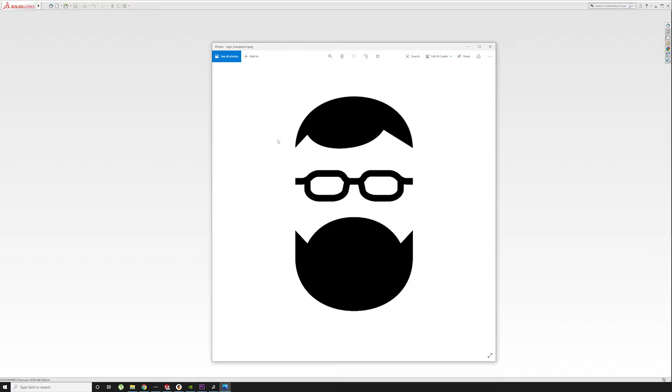So the first thing we need to do is take my logo file here, which is a PNG. We need to convert this into something SolidWorks can deal with a little bit more readily. SolidWorks deals better with dimension files, I guess, if there's a better way to say that. So I'm going to convert this into a DXF.

Now I know you can import this directly into SolidWorks, but I find this process a little bit easier. So I like using Convertio.com. You can pretty much convert just about anything into anything. If you've ever Googled convert PNG to DXF, it's usually one of the top listings. It's free, it's quick, I like it. I'm not sponsored or anything.

So we're going to find the PNG, logo.png, and then we're just going to go ahead and hit convert. It's going to take a couple seconds, and then we can download our DXF. As you can see, I've already kind of done this step down here. So we're going to go ahead and hit download, and that gives us our DXF file.

So now from inside SolidWorks, we're just going to start a new part. Nothing special here. I want to deal in inches because I'm from America. And then we're going to go ahead and hit File, Open, and open that DXF we just created. You're going to get this dialog pop up.

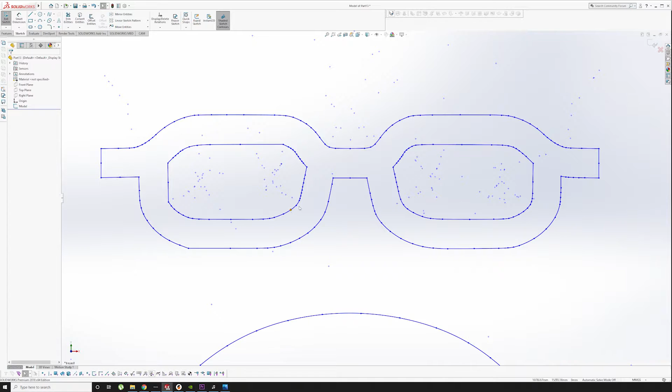We can do a bunch of different things. We're going to import this as a 2D sketch. There are some options you can go through here, but we're not going to mess with any of that, and we're just going to hit finish. So this is what the sketch looks like when it gets imported, and it did a really good job of getting all the lines. Of course, this is a relatively simple part.

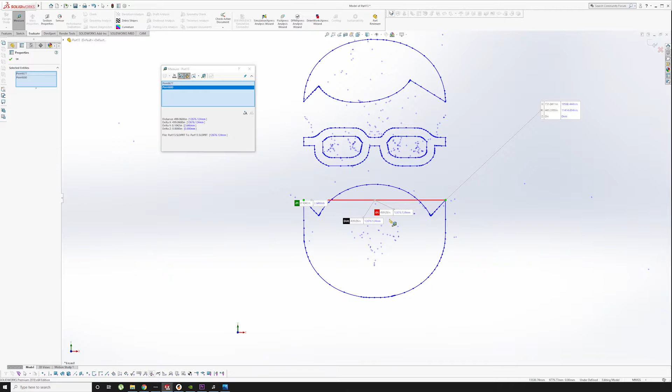So the next thing we need to do is make sure this is the appropriate size. If we go over here to Evaluate, Measure, and I'll just do the width here, it is 499 inches wide. That is a little bit larger than the scale of my CNC router.

So there's a couple different ways you could do this. You could just select this whole thing, go to Tools, Sketch Tools, and do a scale. Or the easier way is I just want to go over to Sketch, Smart Dimension, and set this to the dimension that I want.

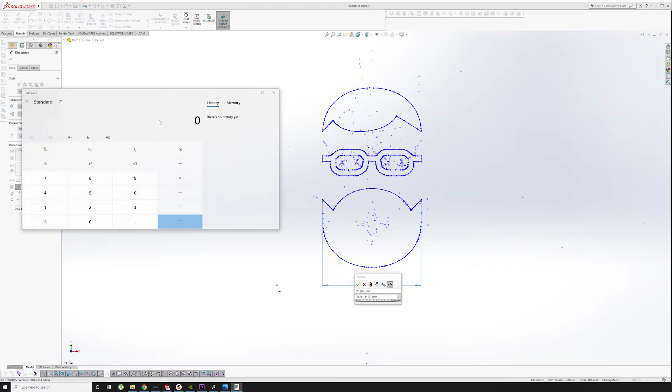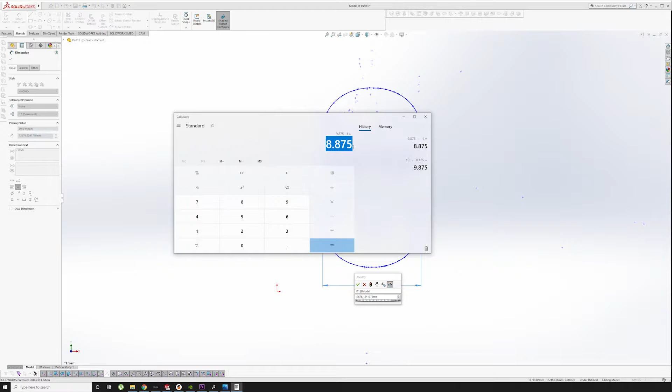Which is going to be... actually that's a good question, so let's open up our calculator. This part is going to be made out of a 10-inch piece of aluminum. So 10 inch, I want a buffer of about 1/8 of an inch for contouring and cutting the edges down, which leaves me with 9.875. Then I'm going to have a 1/2 inch lip on either side, so minus 1. So I want this piece to be 8.875.

This will make more sense later, but 8.875 is what I want this to be. So, 8.875 inches, and there we go, it just kind of scales it. If you do anything else before this, you're going to ruin the drawing and it's going to go all weird. All of this is blue, so nothing is defined. You can see you can drag and screw this up a lot right now.

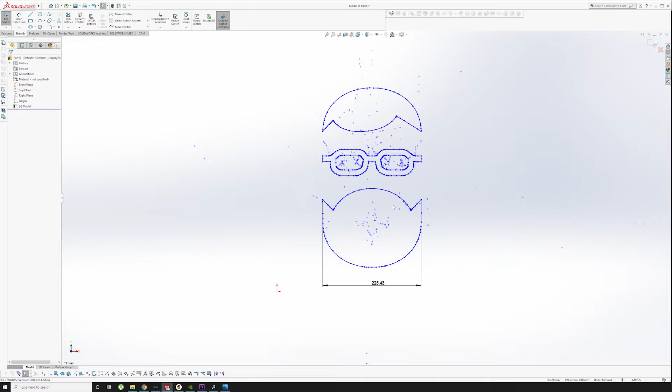So now that this is kind of the appropriate scale, the next thing we need to do is move this down to the origin because it's just in this strange spot. So what we're going to do is create a center line, and I'm just going to do it right here on my glasses.

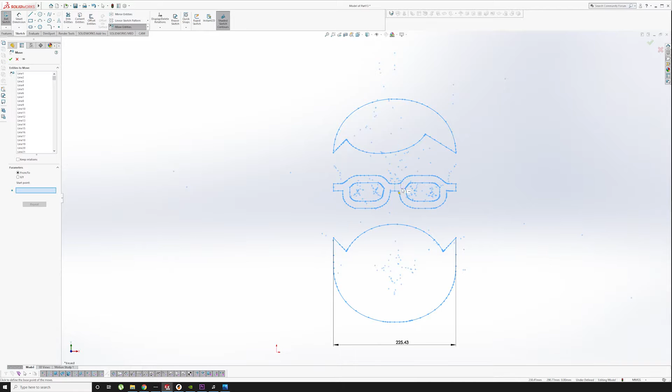This is basically going to give us an anchor point that we can use. So the next thing we do is select everything, then go into Tools, Sketch Tools, Move, and select a reference on where to move it. We're going to select that point, and you can see it's now moving, and then snap that into the origin.

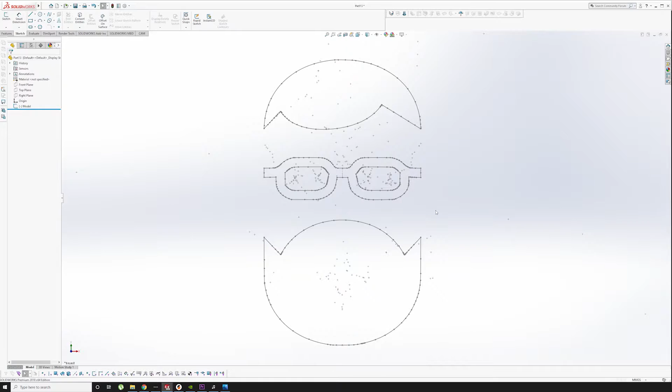So now we have a sketch that looks a little bit ugly, but whatever, and it's snapped directly to the origin. So now the sketch is here, it's in a reasonable spot, it's scaled, all that good stuff.

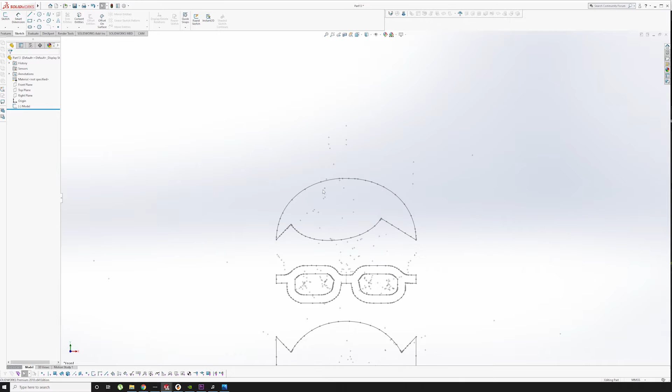Let's clean it up a bit. You see all these little things - basically each one of these is the center of each one of these radiuses, and there's a lot of little lines all along here. If we go up to the hairline and down here in the beard, you can see there's just a lot, and you can kind of see that this bumps up a little bit. We don't really want that, because when I machine this and do the contour on the machine, it's going to try and follow this path, and it's not going to give us the best edge.

So what we're going to do is convert these into splines. Splines are basically these little things - they're just lines that are defined in SolidWorks that really don't have a defined radius per se. They're just nice, smooth, curved lines. So let me show you what I mean here.

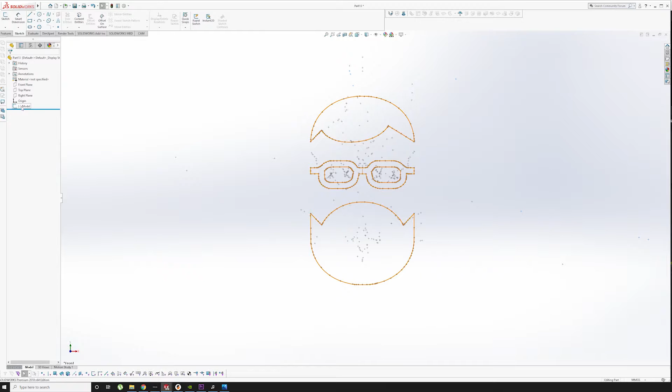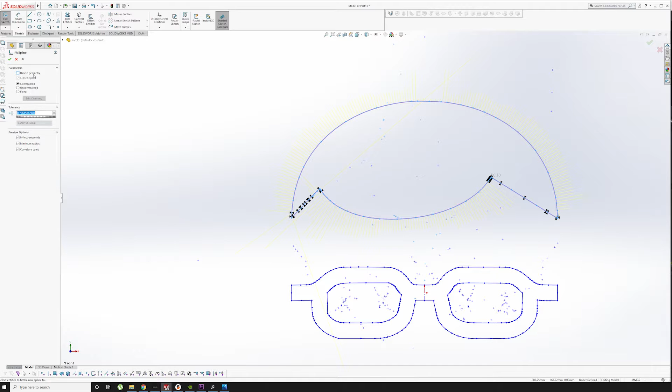So we're going to go into this sketch, edit it, and let's start with the hairline. I'm simply going to select all of this, then go into Tools, Spline Tools, Fit Spline. If I click on this, you can see it makes this new spline all the way around it. Then if I click Delete Geometry, it will actually delete the existing line that's there. So I'm just going to hit OK, and now you see we have this nice, perfectly smooth line.

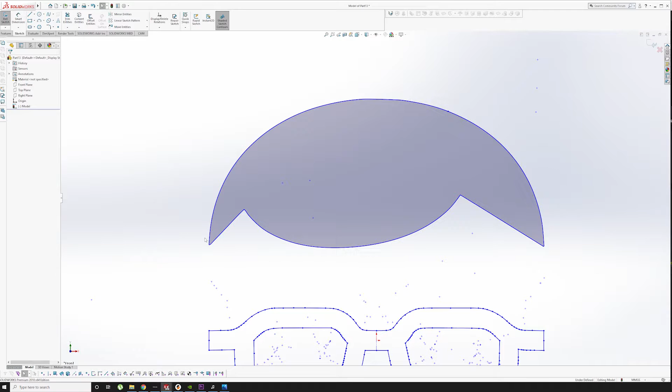Now you can see it's not 100% perfect, but it's totally fine for this. You could go in there and change the deviation if you wanted to get this to fit a little bit better. Or what I'm going to show you here is sometimes we'll have to do this in segments.

So let's go ahead and do the beard next. I've done this previously, and what I found is when you do the beard, it doesn't like to keep these nice sharp angles over here. So I'm going to do this in a couple different pieces. I don't know, for whatever reason, I'm going to exit out and come back in.

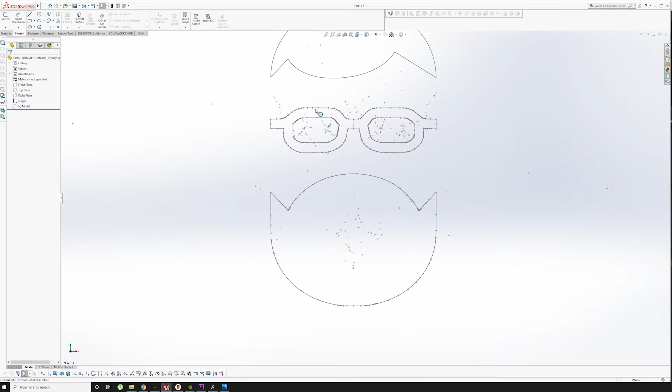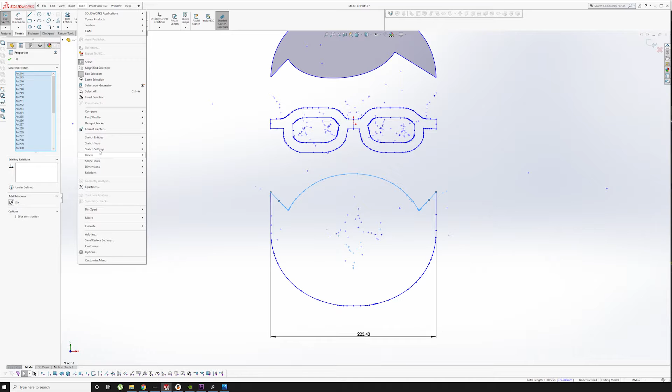That was dumb, but I'm going to select just this section right here. You can see these endpoints didn't get selected, so hold down Control, click that, hold down Control, click that. So now we're just dealing with this section - Tools, Spline Tools, Fit Spline.

We can zoom in and see that everything looks pretty good. Now, one thing is if you click Closed, it will try and close it - that is not what we want. So we're going to click away, and do it in this section. Click OK, and look at that nice, beautiful little spline.

And then we're going to do the exact same thing down below. So we can just select everything here, deselect the spline, Tools, Spline Tools, Fit Spline, and then this looks pretty good. Let's go ahead and just try OK. There we go.

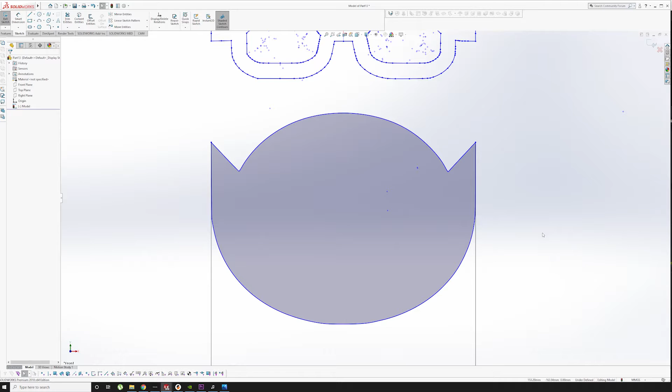So now we have one spline up top and one spline in the bottom, and it's pretty smooth. So now we're going to do the same thing on the glasses.

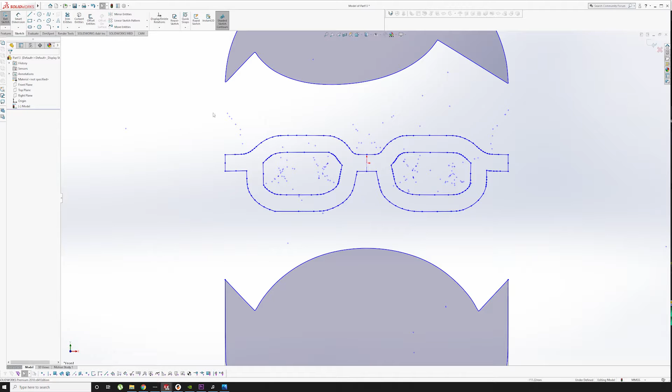We can't select the whole glasses piece because it's actually three distinct line segments. You've got the inside glasses and then you have the outside glasses, so we need to split these up into multiple parts.

Thankfully, the inside lenses of the glasses are easily selected as one loop. If you had an issue where you couldn't select it as one loop, you can just hold Control and then select each individual segment.

We're doing the Fit Spline tool again, and as you can see, it works out pretty good. I hit OK, and then I move on to the other side. Nothing too mind-blowing right here.

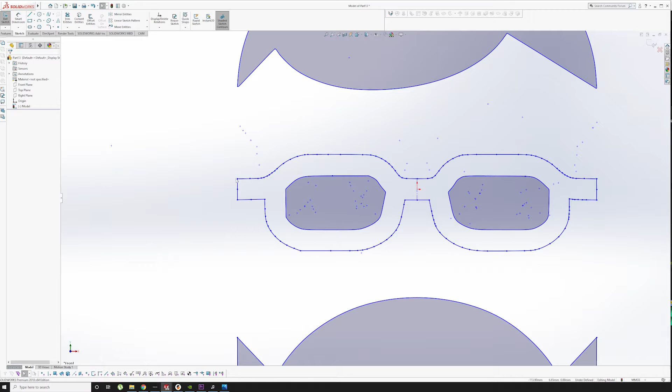If the things didn't work out exactly right, just break it up into individual segments like I did down below for the beard. Now I'm trying to figure out how best to split this up.

If you select everything, which I'm going to do, I think, right here - yeah, oh no, I'm just doing the top. So if you just do the top section, then we can convert that into a single spline, and later I'm going to convert the bottom into a single spline.

So you can see the magic happen right here. Cool, so it makes one nice little smooth curve up top.

Now I tried doing the same thing down below, but watch what happens - it didn't select the two eyeglasses because I didn't select the full entirety of them. So if we go to the fit spline, you can see it looks okay, but it's adding these little radiuses there. It doesn't really like these sharp inside corners.

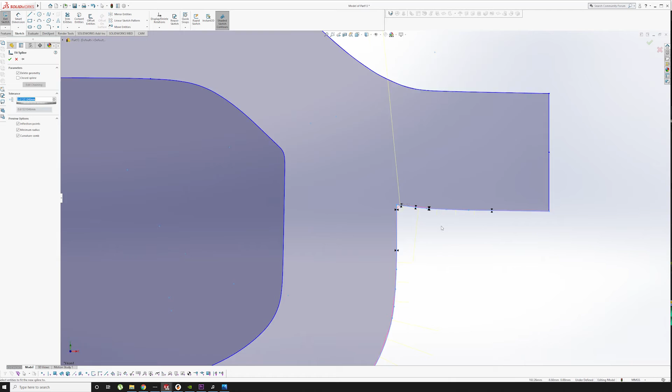This would work for a lot of designs, and I was going to keep it, but what I realize is that when I'm doing the inlay, I want those inside corners to be a defined radius. So I'm going to keep those sharp, and then add a fillet later so that it's basically a defined radius that I can match the inlay with the aluminum.

So what I'm doing here is basically selecting the lower half of the glasses, and I'm creating two separate splines, one on the bottom of each.

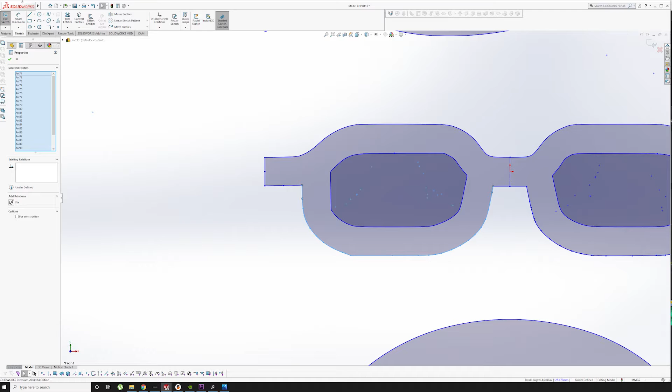Spline tool, fit spline, then we hit OK, and move on to the other side. You can see that creates a much cleaner line, and we still have the sharpness in the bridge of the glasses.

Same thing - hold down Control, select that, back to the spline tool, and then fit spline. I forgot where it was located. There it is, so we're going to go ahead and hit OK.

And then the rest of this is I am just going to clean up the rest of these, because we might as well have as few segments as possible. We want to simplify this sketch down into the most basic components.

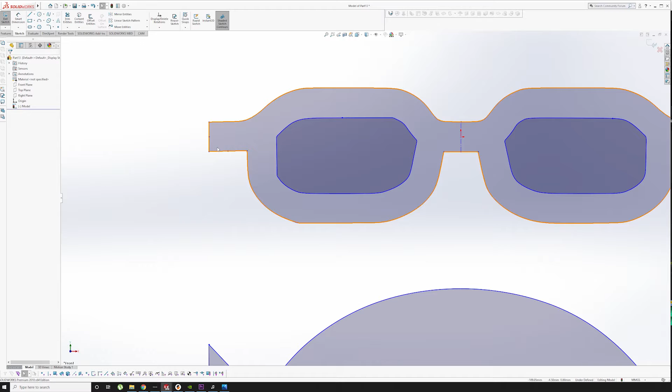We want to have as few line segments as we possibly can. And here you can see I shifted it - don't do that. Go ahead and look at it, marvel in your work, and then fix the rest of these using, once again, the Fit Spline tool.

So yeah, that's really all there is to it.

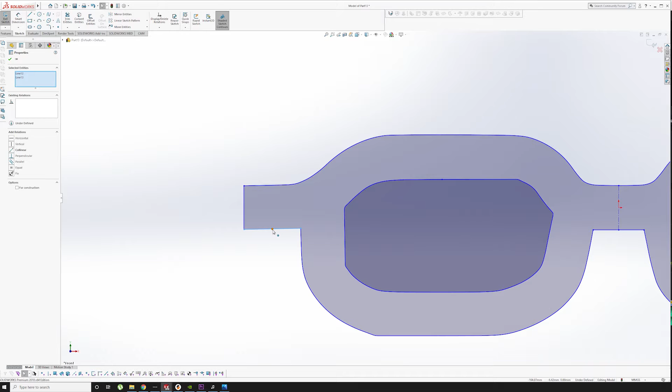This is a new tool that I am just becoming familiar with. This is one of the first times I've ever imported things in and manipulated them, so this was kind of fun to figure out. So yeah, we're just getting rid of these additional line segments.

Okay, so here is the point in the video where I realize I made a very fatal mistake. The top of the hair needs to be a separate spline from the bottom section of the hair so that we can do the offsets properly.

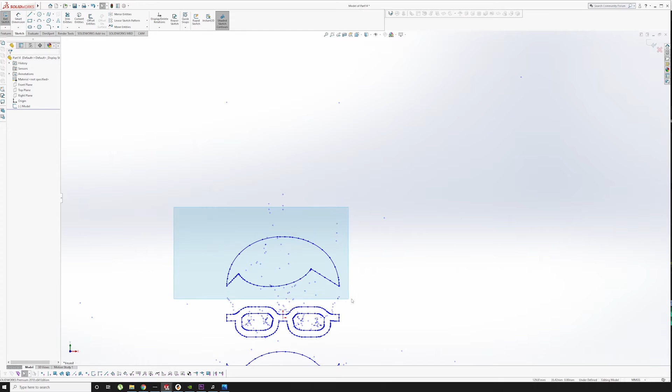I did the beard the right way, but I didn't do the hair the right way. I was too focused on other things and didn't think about it, but the top section of the hair needs to be a separate spline. So I went back, re-imported everything, selected just the hair, copied that over, and made two separate splines. So now we're good, and now we can do the offsets.

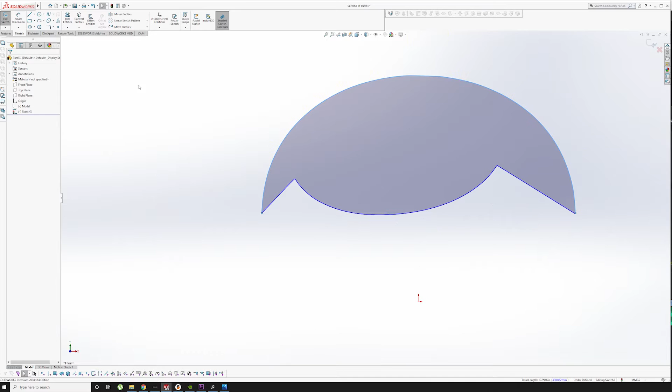Okay, so now that we have everything together here, I've got my separate sketch, which is now just the hairline. We need to do the offsets, basically the frame or border that goes around everything using the offset tool. I'm going to hide this one, start with just the hair, select away, click sketch, and make sure we're on the front plane.

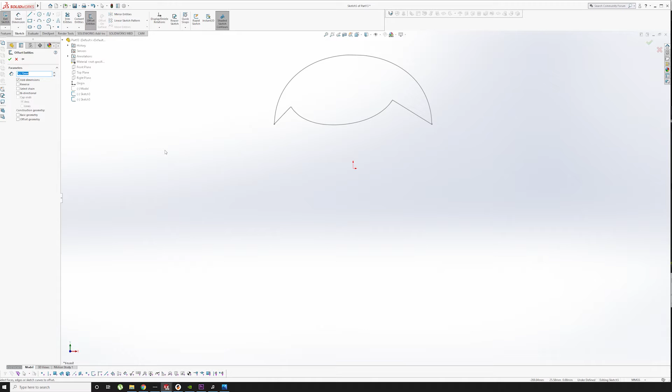So now we're going to go over to Tools, Sketch Entities, Sketch Tools, and do Offset Entities. We'll select the hair, and boom. We want a 1/2 inch offset, so that's 12.75 or 12.7, and we hit OK.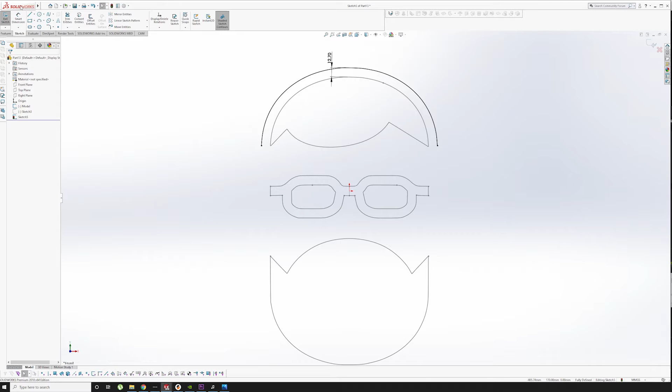Then we're going to switch view because this is nice and floppy now, and do the same thing down here with the beard. Back to Tools, Sketch Tools, Offsets, and hit OK. Now if we hide both of these original sketches, you see we have this nice frame that is perfectly spaced out. We just need to connect these two.

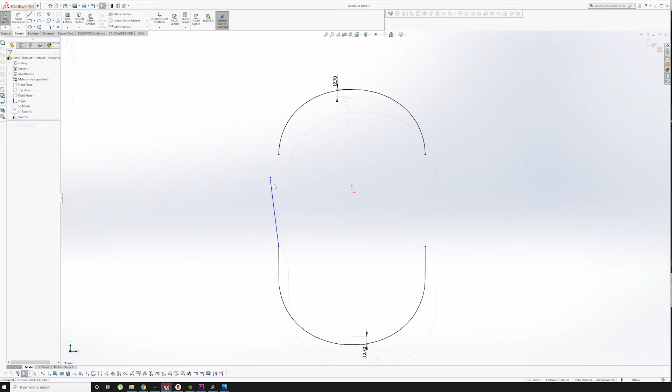So I'm going to start with the bottom, draw a line up. Now I'm going to do this, and I'll show you why. We want this line to be parallel with the right-hand plane, so we're going to select the right plane and this line, and go with parallel. Now it is perfectly up and down, and we're just going to kind of extend it past, and you can see there's this little bit of a nastiness that happens.

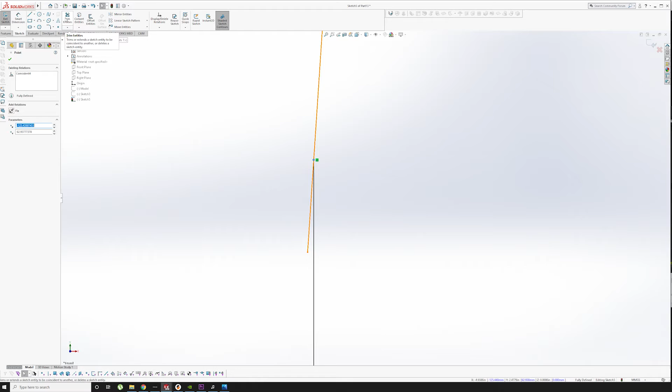So what we're going to do is intersect this with that line, and then use the trim entities to just kind of trim that away. Now we have a perfectly parallel line. If we had not done that, it would have been kind of crooked off to the side.

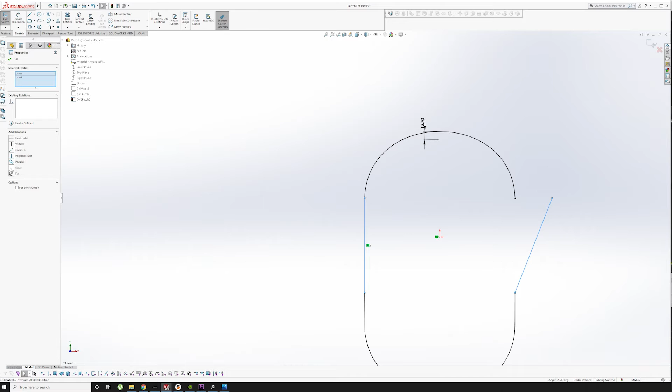Then we're going to do this on the other side. Just draw a line, take that, and now we can make it parallel with this other side. We're going to do parallel. Make sure this intersects right there, and then use the trim entities. And there we go - now we have the outside frame.

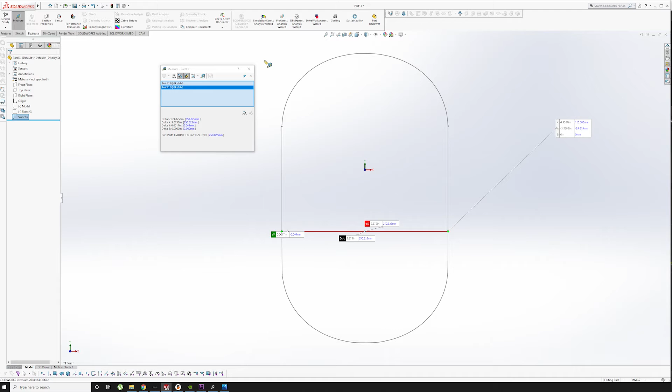Okay, so we're almost done. We have our frame, we have the sketch. Let's go ahead and just double check some things. Let's go evaluate, measure, make sure our width is good - yep, 9.875 inches, that's exactly what we wanted. And then we can maybe check top to bottom - overall is 16.5. That looks about good.

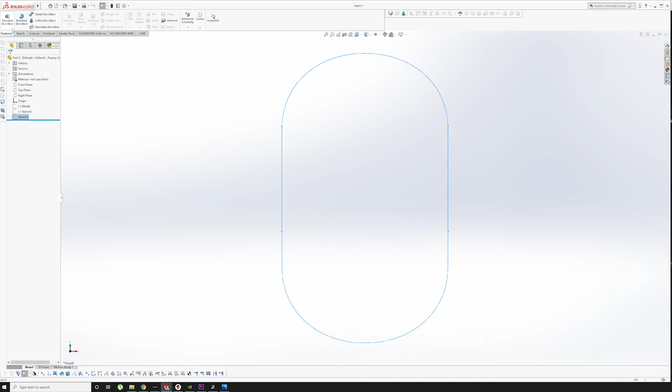So now we're going to go ahead and extrude this. Make sure we got the front plane selected here. We're going to take this sketch and extrude it. Let's go back into inches. I'm going to take this, extrude it, and this is going to be 0.75, 3/4 of an inch.

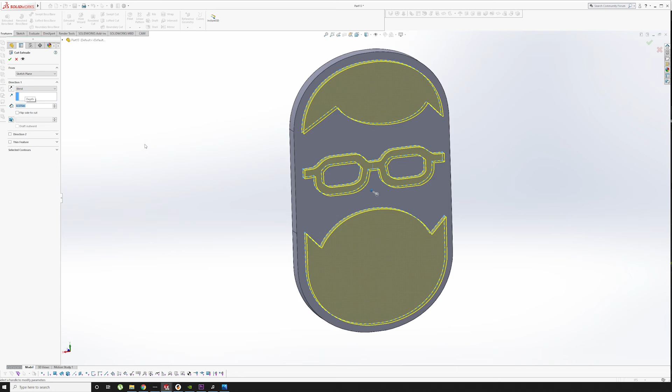So that looks cool. And then we're going to have to go from the back side here. So we're going to take this sketch and cut it in, extrude cut, and we're going to cut this in 3/8 of an inch. You can see it's poking out, reverse direction, and there we go.

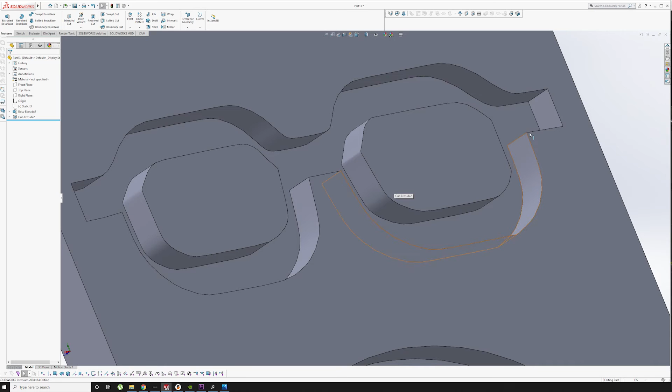This is essentially what we're trying to do. This is going to be made out of aluminum, and the inside of here is going to be the walnut inlays, and it's going to be relatively large. So the only thing we need to do next is make sure that none of these sharp corners exist, because we can't cut that with our end mill.

Our end mill is going to be probably 1/8 of an inch for all of these, so we're just going to go and add fillets so that there are none of these sharp edges here.

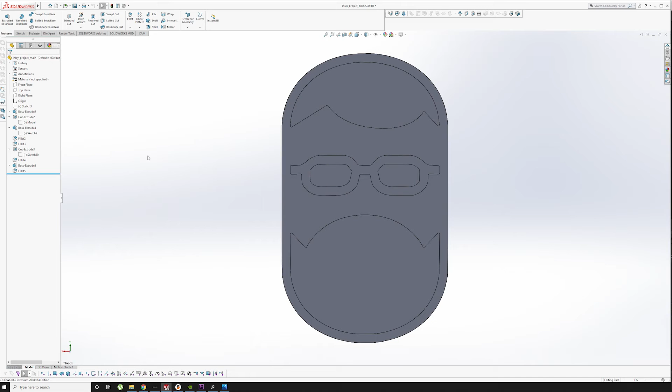Okay, so here is our final part. I did a few things off camera because it was kind of tedious and annoying. For all of these sharp corners, I went ahead and added a fillet. The fillet is equal to the radius of my tool, or half of the diameter. So since I'll be using a 1/8 inch end mill for all of the finish cleaning, I just did a 1/16 of an inch for the fillet.

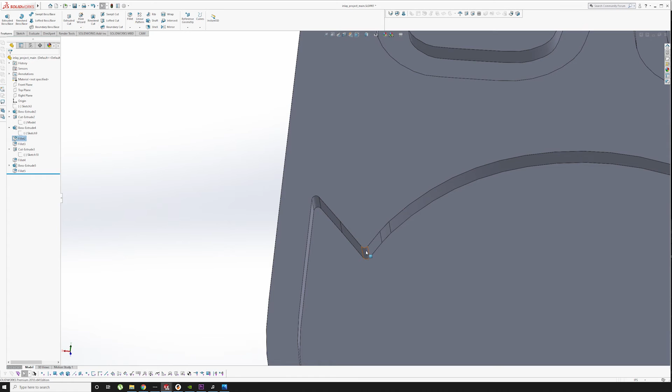Now in some of these locations, like right there, I added these bosses in. I'll show you what I did. So if you look at this, I actually drew these triangles, which made a sharp point so that I could later come back and add a fillet.

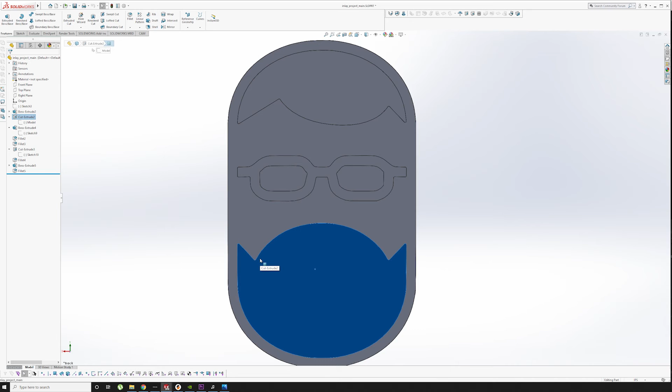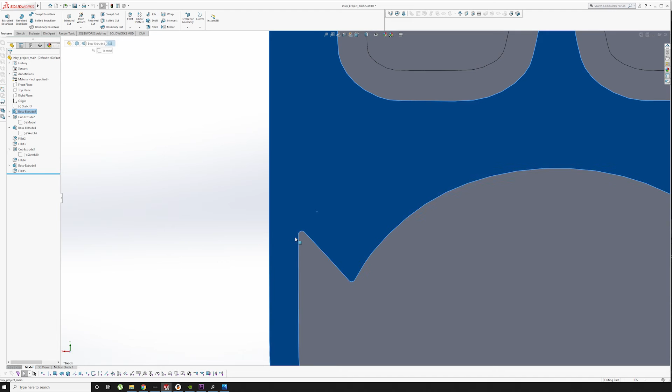Some of you might be a little confused as to why I'm doing any of this. Basically I have the positive and then I have the negative, and those radiuses need to match each other. Since they need to match, I need to make sure it's a radius that I can actually cut. For instance, when I'm cutting the aluminum, I can't cut a perfectly sharp corner. I can do that on the walnut, but not on the aluminum. So I need to make sure the minimum radius is one that I can cut with the 1/8 inch end mill, so this radius matches that radius, and so on and so forth.

I made all the glasses the same radius. So I just went in and built up, using these sketches, sharp corners, and then used a fillet to bring them back down to 1/16 of an inch.

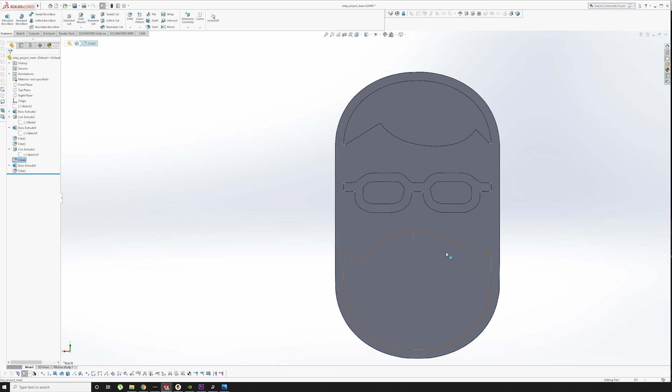So here is the final piece. I went ahead and selected 6061 as the material, and just for grins, if we look at the mass properties, we can see that it is 7.8 pounds just for the aluminum, so we're definitely going to be over 8 pounds for this total part, which is pretty cool. I like it, it's going to be nice and substantial.

Part of the reason for me doing this video series is, one, to show you the better process on how you use a CNC router, but also to break the myth that CNC is super easy. A lot of people think that if you just have a CNC machine, making something like this is inconsequential, that you just click a few buttons and instantly have a part. It's really not that straightforward. This video is roughly 20-25 minutes, and that is just for importing an image into here, so there is quite a bit of work that goes into this.

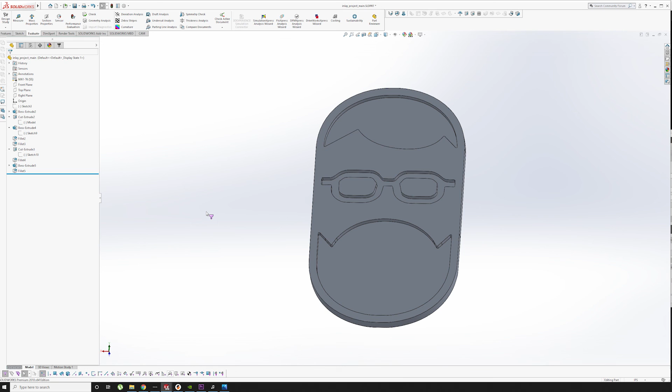This is the CAD portion, so CAD, Computer Aided Design—that is the design portion. Now we're going to move into the CAM, which is basically setting up the instruction sets: creating the job, setting the stock size, and then defining all of the tool paths. They're going to be actually cutting the aluminum as well as the walnut. That is going to be the next video.

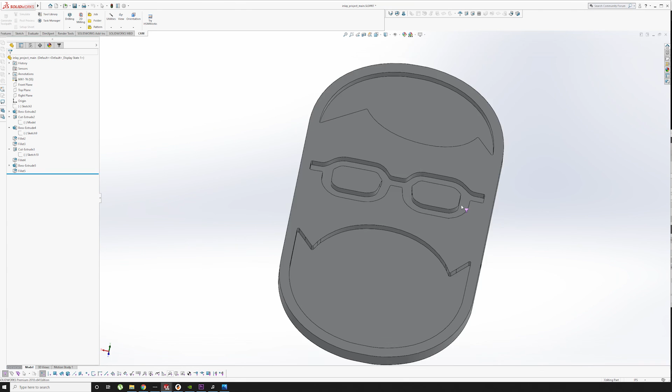Hopefully you got a little something out of this, maybe learned some new SolidWorks tips and tricks. The beautiful thing about SolidWorks is there's a million different ways to do everything, so seeing someone do something different is always nice. That concludes the design portion of this video.